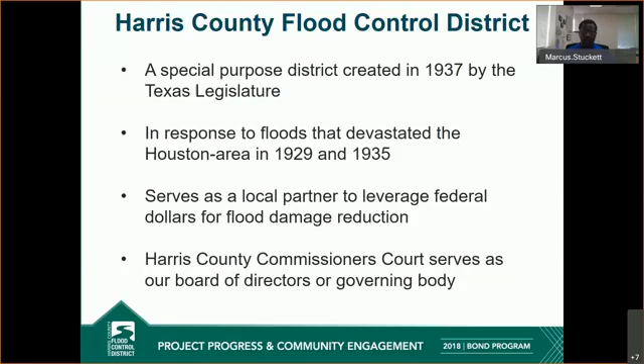The mission of the Harris County Flood Control District is to provide flood damage reduction projects that work with appropriate regard for community and natural values. One of the most difficult challenges we face is constructing effective projects that are sensitive to community and natural values in a highly urbanized area.

Harris County includes 22 main watersheds, totaling approximately 1,800 square miles and more than 2,500 linear miles of channel. 2,500 miles is approximately the distance from New York to California. Each watershed has its own unique characteristics and needs. Tonight, we're discussing the White Oak Bayou watershed located in central Harris County.

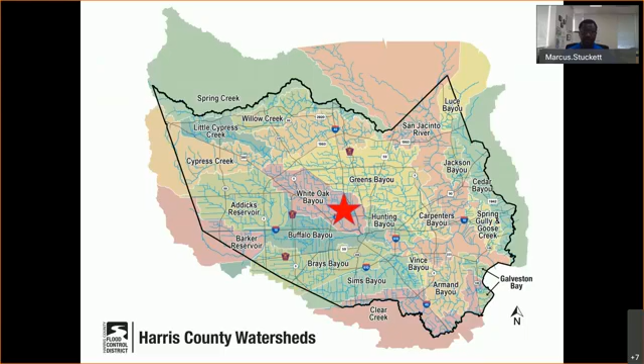Our area is flood prone, and here are some reasons why. We're prone to flooding because we experience extreme rainfall events such as hurricanes and tropical storms. We also have flat, slow draining topography or landscape, and we also have clay soils that do not absorb excess rainfall as quickly.

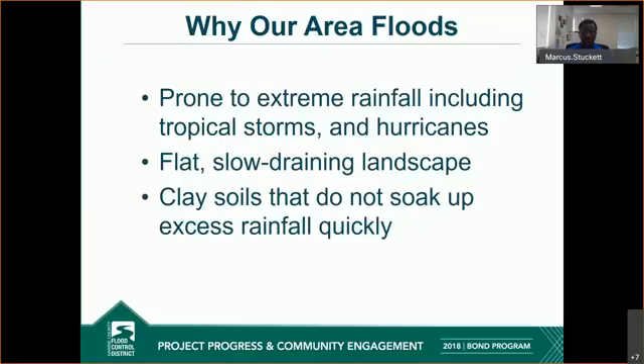On August 25, 2018, Harris County voters approved $2.5 billion in bonds for flood risk reduction projects. This vote followed a series of meetings across Harris County in each watershed, which resulted in a list of what is now more than 181 bond projects.

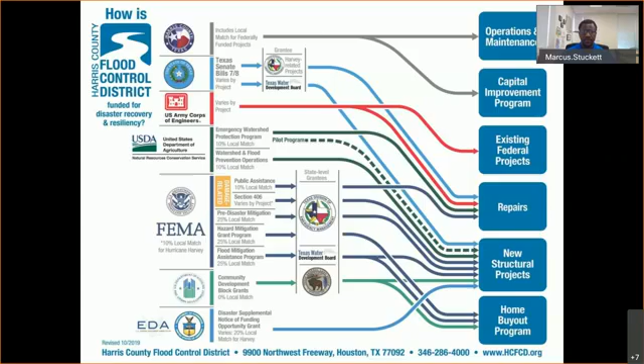The United States Army Corps of Engineers is our major partner on the White Oak Bayou federal project. We will go into more detail about their contributions later in this presentation. Now, let me give you some project-specific information as it relates to the White Oak Bayou federal project.

White Oak Bayou is the primary drainage channel in the watershed. It has several tributaries which drain into it. Some of the major tributaries are Little White Oak Bayou, Vogel Creek, Cole Creek, and Brickhouse Gully. Little White Oak Bayou, located along the eastern edge, and Vogel Creek, located in the middle watershed, drain in from the north, while Brickhouse Gully and Cole Creek, also located in the middle of the watershed, drain in from the west.

The bayou begins near US 290 and Huffmeister and flows 26 miles southeast to its confluence at Buffalo Bayou near downtown.

Beginning in the 1960s, the U.S. Army Corps of Engineers began working on White Oak Bayou along a 10.5-mile stretch between its confluence with Buffalo Bayou upstream to Cole Creek. By the late 1970s, the United States Corps of Engineers proposed a new project to complete its work north of Cole Creek.

Congress authorized the Corps of Engineers to begin the project through a Water Resources Development Act of 1986. A decade later, Congress transferred control of the White Oak Bayou federal project to the Harris County Flood Control District in partnership with the United States Army Corps of Engineers.

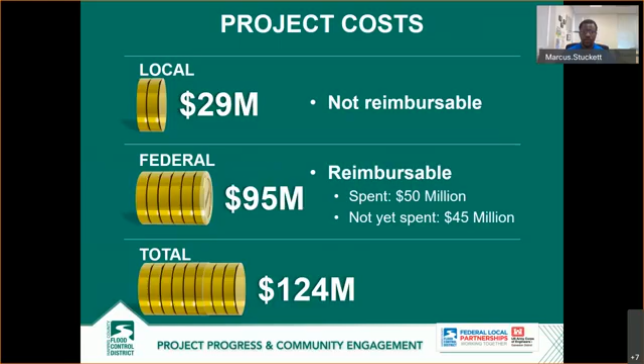To analyze this project, we use a 1% annual exceedance probability, or 100-year rainfall event. This rain event equates to approximately 13.2 inches of rain in a 24-hour period, which is the basis for FEMA's regulatory mapping of the 1% or 100-year floodplain.

We found that this event in the models indicates a reduction of the base flood elevation from a couple of inches to almost 2 feet, depending on where you live along the channel.

We've already completed the majority of the work on the federal project, including excavation of new stormwater detention basins at Fallbrook and in the Ranchstone area, one along Beltway 8 West, two along Fairbanks North Houston, and one adjacent to Hollister Street. That's in addition to the Jersey Village bypass channel.

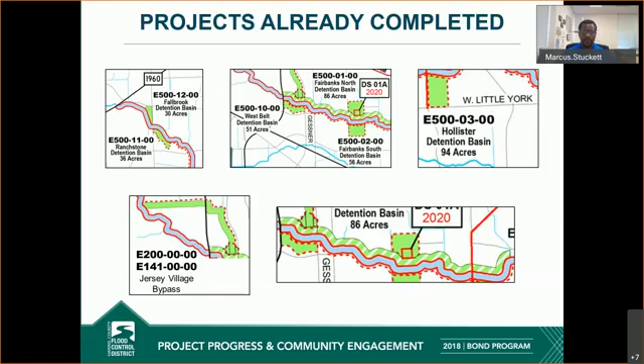The remaining construction activities have been broken into two separate segments. For the approximately 10-mile upstream segment located between FM 1960 and Hollister, construction will begin in the next few months.

The remaining 5-mile downstream segment from Hollister Street to the confluence with Cole Creek near Tidwell is expected to begin construction just after the first of the year. Both projects should be completed by the end of 2021.

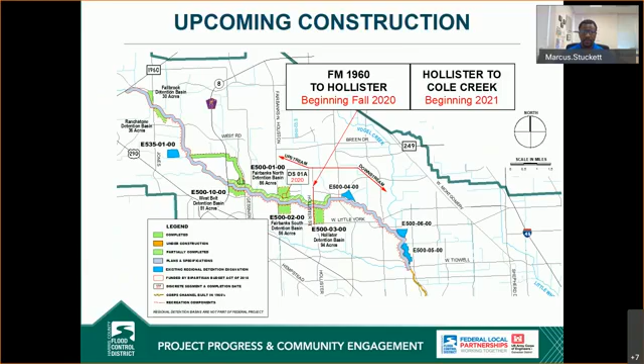In addition to the work on widening and deepening White Oak Bayou, we will also be replacing and modifying storm drainage pipes that will allow the detention basins to empty back into White Oak Bayou.

As an added recreation benefit, the White Oak Bayou Hike and Bike Trail from downtown Houston, which currently ends at the Hollister Stormwater Detention Basin, will be extended to the Ranchstone Stormwater Detention Basin, as depicted by the green lines on this map.

The route will follow the south bank of the bayou to the West Belt Stormwater Detention Basin, then cross the bayou and follow the Jersey Village bypass channel, connecting into the existing MUD District trails. Additional trails upstream of the MUD Trail to the Ranchstone Detention Basin will also be built.

Once completed, Harris County Precinct 4 will take over maintenance and upkeep of the trails, except for those under the jurisdiction of the MUD.

In the interest of public safety, all trails along White Oak Bayou between Hollister and 1960, except the trail along Jersey Village bypass, will be closed for the duration of the construction period. There may be some minor traffic delays and occasional lane reductions when construction is taking place near the bridge crossings on White Oak Bayou.

So what are our next steps? We expect construction to begin on the segment from 1960 to Hollister during the early fall of 2020. Construction on the final segment from Hollister to Cole Creek will likely begin sometime this winter.

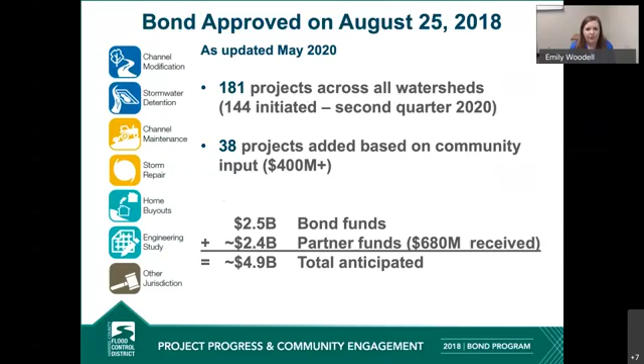Thanks, Marcus. I think that's helpful context for this conversation. Jennifer, our next question is going to come your way. Fred D asked if construction will occur along the entire section from Hollister to FM 1960, or if it will occur in segments throughout the project. Does that mean segments will be worked on simultaneously, or will it go from downstream to upstream?

Great question, Fred. Since this project is on an expedited schedule, there will likely be multiple crews staged at different portions at once. Typically we work downstream to upstream, but it will be the contractor's responsibility for care and control of water once he takes over this project and accepts the award. So however he decides to cut it up and do the project, he will still be responsible for care and control of water throughout the course of the project.

Perfect. Thank you, Jennifer. I'm going to follow up on that question with one other. I've seen a few comments come through just about the project timeline as a whole. Could you speak to that at a high level for us, and when folks might see activity?

Sure. So with our agreement with the Corps, we need to be finished with everything by the end of 2021. That's what we're looking to do, and that's the contract timeline that we've given. We expect to start work here this fall. We're receiving bids this week, and we hope to award the contract in August, in the next Commissioners Court meeting, and get rolling late September, early October, and be finished in late 2021.

Perfect. Thank you, Jennifer. Gary, I'm going to give our next question to you. Bob Lee asked if the project is going to be as described in the August 2014 revision of the general reevaluation report, or if there's a more recently revised document that the public should refer to for that.

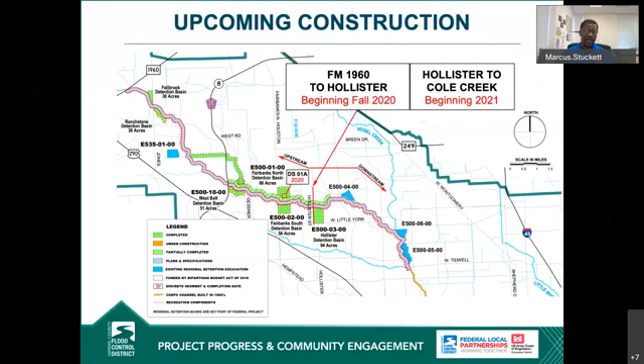Perfect, thanks so much Marcus, appreciate that quick overview for anybody who joined late. Gary, I'm sending our next question to you - it would be great to provide clarification around the hike and bike trails we highlighted, so folks understand which trails are going to be closed and where new ones may be going in.

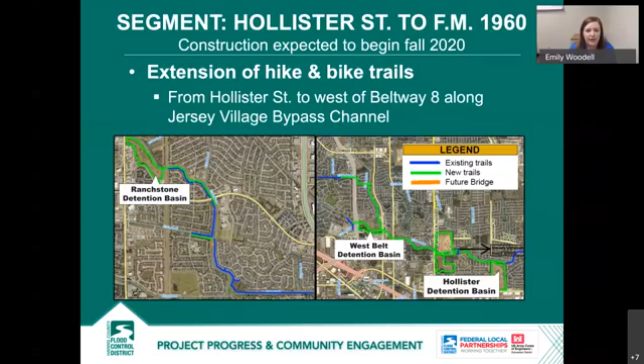On this particular slide, on the right-hand side you can see the new trail going up parallel to Gessner, then heading west, going underneath Beltway 8. Once you get past Beltway 8, there's a dog park on the north side, and a trail that starts there and runs west along the Jersey Village bypass. That segment of the trail will remain open.

We're only putting the trail in from the dog park to the east. But once you get all the way to the end at the other big detention basins, on the far west end of the Jersey Village bypass, that trail will be closed around the detention basin and north up towards the Cy-Fair school. That's because we'll be working on the channel itself along that segment, but we will not be doing anything along the Jersey Village bypass. So there is a section that'll still be open that the public will have access to from the dog park. And then there's a couple intermediate places, and you get out to the pedestrian bridge that crosses a lateral channel in there. All that will still be open.

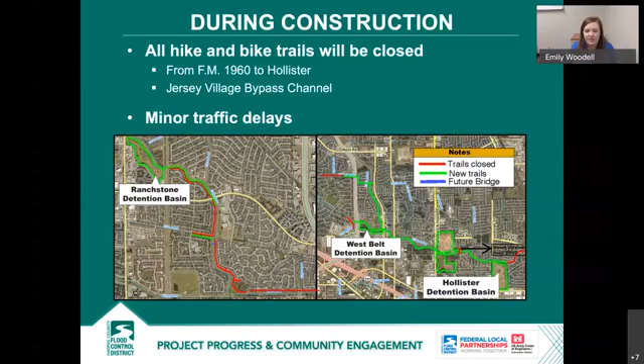One thing I wanted to highlight while giving folks a chance to submit additional questions is reiterating how to stay up to date on this project. This is really critical for us to share with you. We want to emphasize that up-to-date information on this and other projects in the watershed is available at hcfcd.org/C14. That takes you directly to information about the project we're discussing tonight, but also gives you access to the full suite of projects the Flood Control District is working on, as well as links to some of our partners.

I also want to emphasize how we're looking forward at the next two weeks. After this meeting, we do have a comment period open for this project. However, that does not end our engagement with the public. We welcome comments, questions, and suggestions throughout the life cycle of this and every project we work on. During the comment period, please feel free to submit comments online, on the Flood Control District's website, or via phone at hcfcd.org/C14. There will also be a live recording of this meeting available on that site and the Flood Control District's YouTube channel, an easy place for everybody to reference throughout the life cycle of the project.

As we move forward, Jennifer, I think it would be great if you could talk a little bit about any additional improvements being made as part of this project, whether drainage improvements to get to the channel, or the bigger picture outside of just the channel itself. I'm going to pass that over to Gary, he can give a better detail. Perfect.

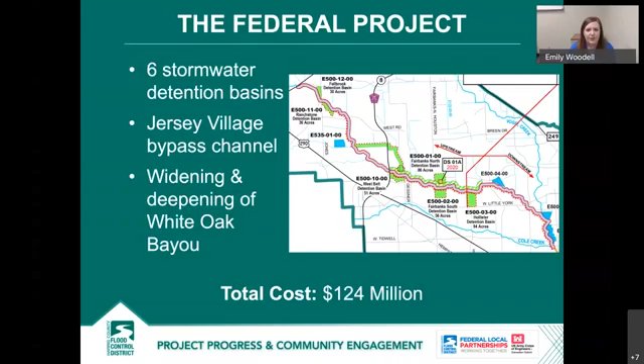Are those for remaining projects from August 2020 forward, or do they represent total cumulative reductions inclusive of past completed projects? Yeah, they represent the total of the project, which includes all the detention basins.

So a lot of the benefit that you're already getting is from the detention basins, and we still have the channel to work. That'll get us the final total reductions that you're seeing on that slide that Marcus had talked about earlier. So that was in the original general reevaluation report, and that's the same benefits that we had to maintain for the project, and our final engineering studies that show what we're doing for the project supported those benefits.

And that's part of what we have to confirm with the Army Corps of Engineers, is that the benefit of the project is lowering the water surface, and that's the benefit of keeping water out of homes and businesses. That's the dollar benefit that the Army Corps of Engineers requires us to get. And of course, the cost is the cost of building it, buying the right of way, and that gets down to our benefit to cost ratio.

Perfect. Thanks, Gary. Jennifer, our next question is going to come to you. Virgil and Catherine Osborne asked if excavations and other work will be done Monday through Friday, and what the hours we're looking at might be for that work.

Sure, good question. So the contractor, while we can't hold them to say Monday through Friday, they could work Saturday and Sunday. What we can hold them to is noise ordinances for Jersey Village, for City of Houston, Harris County. They'll have to abide by all those noise ordinances and be compliant with that.

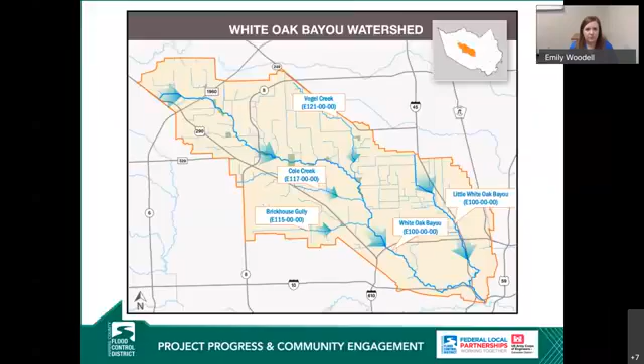Yeah, the overall project really started back in '86 and then '96. It takes a long time for the Army Corps of Engineers to work out a partnership and then come up with a final design. They just don't say, well, let's just make the channel wider and let's make detention basins. They've got to go through the one slide that Marcus had that talked about all these different components. They get all these different components: detention basins, channel improvements, how wide the channel improvements are, how big the detention basins are, and they've got to get it down to what the best benefit to cost ratio is.

And of course, the cost is the components, how much it's going to cost to construct those. The benefit is how much lowering of that base flood water is. And the reason that's important is that's how we get the funding, because we have to compete nationwide with all projects in the U.S. that the Army Corps of Engineers is working with, and you've got to have a high benefit to cost ratio. If you've got a benefit to cost ratio of 1 or 2, you're going to be on the bottom of the list rather than 6 or 7 like we've got on White Oak.

And so since we've got a good benefit to cost ratio, we've been able to get funding. And then the latest has been the bipartisan act after Harvey that guaranteed the balance of the work to be funded out. We still have to recoup some of the costs or get reimbursements from the Army Corps of Engineers for the work that we did before the bipartisan act. But they've been slowly coming up with the funds, and we've got an agreement with them, so it's going to take a little time before it all gets appropriated to us.

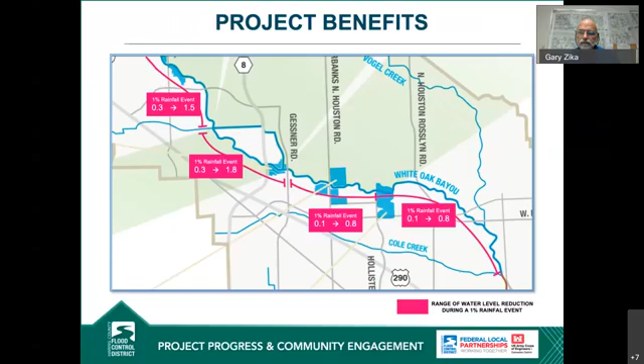Thanks, Gary. Appreciate that. One thing I did want to remind folks — we've seen a lot of comments about other projects and areas in the watershed. I just want to remind people that we will be following up after the meeting on these types of comments. Tonight we're really honed in and focused on the White Oak Federal Project, and want to make sure we're sharing as much information about that project as we can. Other questions that came in, we'll make sure we're following up after this and continuing the conversation as it moves forward. We want to be as responsive as possible.

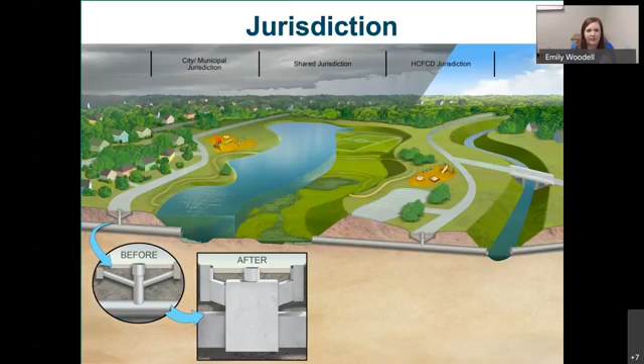Marcus, I want to kick back to you for our next question. If we can go back to the slide that delineates the jurisdictional responsibilities within Harris County. We've had a couple of voicemail comments come through—just a reminder that that's an option for participating—from folks who have questions about neighborhood flooding and street flooding. So I think it would be helpful for us to go back over this information, and Marcus, if you don't mind leading us through that.

Sure, thanks. So what we're looking at here on this exhibit is, to the left, you have what's labeled as city/municipal jurisdiction. What that means is most neighborhoods have either a roadside ditch or a storm sewer. Some of the infrastructure is much older, and it was based on previous data for rainfall for how you would design your storm sewer systems or the size of your roadside ditches.

As time goes on, the rainfall starts to increase because we have more data, and so you find out that the amount of rainfall a neighborhood was initially designed for no longer works. So in order to prevent those neighborhoods from flooding, they have to increase the size of the storm sewers, convert from roadside ditch to storm sewer, or increase the size of the ditches.

Well, when you do that, it releases more water into a bayou. Harris County has a policy of no adverse impact. So by increasing the size of those culverts, shown on this exhibit as going from a round pipe to a larger box structure, that pushes more water into the bayou.

There's a couple of ways you can deal with that. You can either add more capacity to the channel, which only pushes the increases to the bayou downstream. So eventually, at some point, there has to be a detention basin, or you create some type of inline storage in the bayou. We typically prefer not to do inline storage, so we use detention basins.

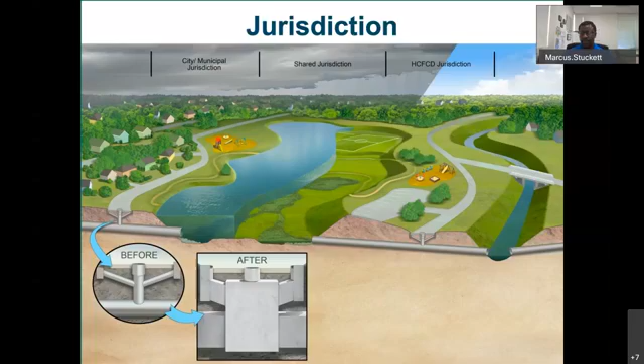Thanks, Marcus. I think that's always a helpful message. Now we've had a question come in about easements. So Gary, can you talk a little bit about easements generally and also the long-term maintenance associated with those pieces?

Yes, the easements—we've either got Harris County Flood Control outright owning the property, which we call fee, or it's an easement, where the underlying property owner is probably the adjacent homeowner or sometimes a business. Those easements give us the right to do the channel improvements and to maintain the channel in that section.

It's also part of the requirements for the Army Corps of Engineers, being a project, that they want to make sure the invested money that goes into the project can be maintained over the long run. So not only do we have to go in there and do the work to construct it, but we also have to have a way to maintain the project after it's done.

Presently, there's a few areas where we've got what we call encroachments, where property owners have moved fences to the top of bank, but that's not where the easement is—the easement is further back. So we've got to be able to work in those easement areas, the full easement we've got for flood control, to put what we call a backslope swale system that's meant to keep water from draining over the tops of the bank.

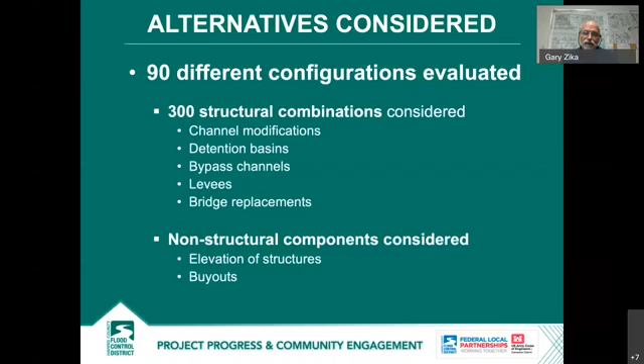The non-structural components, elevations of structures—that's the individual homes—whether it made sense for buyouts or could you elevate those structures. Jersey Village is doing a little bit of that. They've got some grants that they're able to use, some of the homes in Jersey Village proper that they've gotten grants to raise those structures. Very costly. For us, it didn't work out for a positive benefit to cost ratio for doing elevation of homes. So there's a lot that goes into it, a lot of analysis, because you're trying to find the right mix, and you've got guidelines that you got to follow with the Army Corps of Engineers to come up with the best benefit to cost ratio.

Perfect. Thanks, Gary. I think people know how much goes into these projects, but the amount of planning is really robust, and it's a great process that everybody goes through.